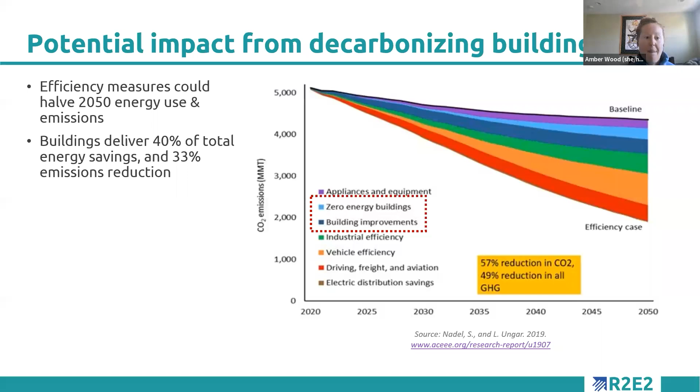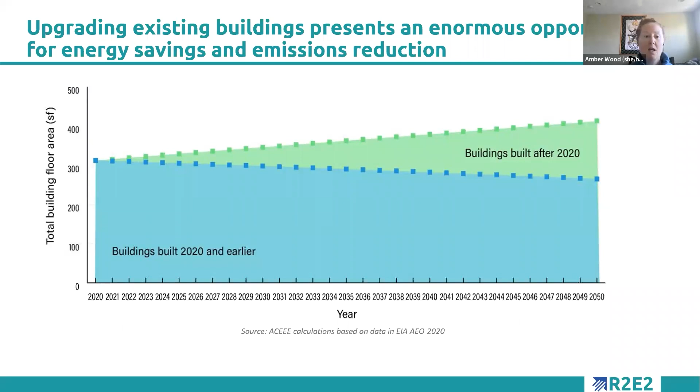So one of the questions might be, what is a building energy upgrade or retrofit, since we're using the terms interchangeably here? Before we explain decarbonization, we're going to talk a little bit about how we approach buildings. We approach them under three categories: single family, multifamily residential, and commercial buildings. The scope of retrofits and service providers who offer these services differ, as do the financing.

So the idea is that the retrofit or upgrade is really intended to be a tune-up, repair, or replacement of systems or multiple systems, with the goal of improving comfort and reducing costs.

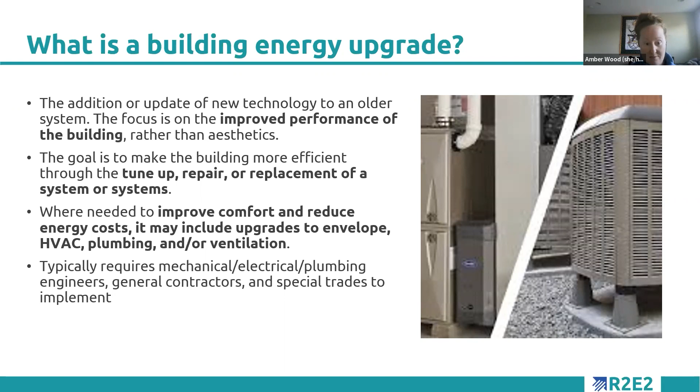So those are kind of single retrofits - the possibility to simply upgrade an individual piece of equipment, like a heating system. But we also want to touch here on comprehensive building energy upgrades, which are a whole building approach.

Sometimes this gets into deeper energy savings, but really we're talking a whole building approach which addresses multiple systems - a suite of measures across a whole building, with the idea that we're also trying to improve things like indoor air quality, moisture, and pest management, and make buildings more resilient.

To give you some context, typically these can achieve 10 to 20% savings, and with a really deep energy retrofit may reach deeper energy savings up to 40% for whole house comprehensive retrofits.

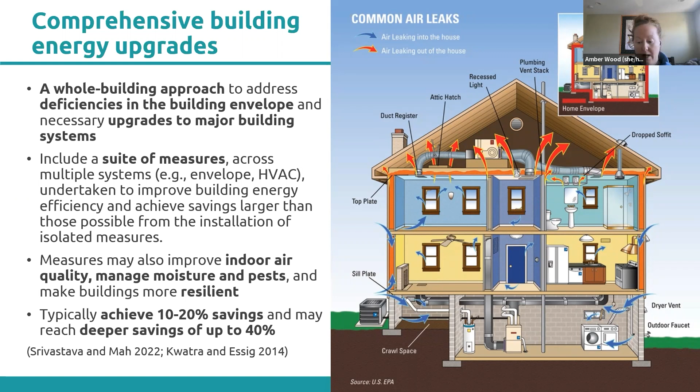We also want to define a little bit what we mean by electrification. So the high upfront cost of electrification - we're meaning electrifying the building systems in a particular home, replacing fossil fuel end uses such as heating, cooking, and even transportation with electric powered technologies.

The high costs of those are challenging for affordable housing owners, including low-income homeowners and multifamily property owners. Such stakeholders often lack the means to invest in electrification technologies and may have other priorities for any available investment dollars that we want to be sensitive and mindful of.

Additional barriers to electrification may also include uncertainty and variability of monthly energy cost savings from electrification, particularly heat pumps for space heating, due to differences in climate, electricity rates, fuel costs, and equipment efficiency.

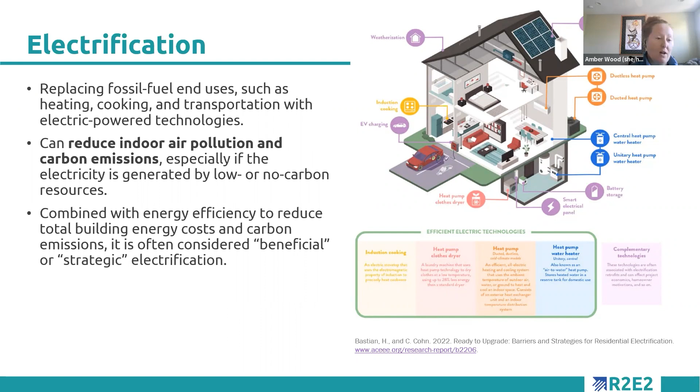So we just want to note that what we're really talking about here in the electrification space is beneficial or strategic electrification, where we're ensuring that we're considering all of these factors as we're talking about electrifying building systems.

Energy upgrades and electrification are often intertwined for decarbonization. We often talk about energy efficiency as the basis for decarbonization, and that usually involves both energy efficiency from the standpoint of weatherization upgrades, envelope upgrades, and then adding...

Electrification of existing fossil fuel end uses like water heating and space heating. And then it can also include potentially solar and other use of carbon-free fuels beyond that as well.

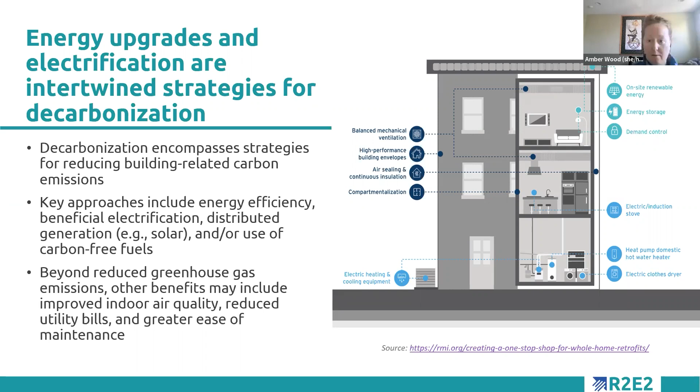So with that, we have another activity. I think this is actually the third question - if Ethan, you could bring this up - what are your main priorities when you're thinking about developing a building upgrade initiative? This has a little bit more reading, so I'm going to pause here and let you go through the options, and we'll give you a minute and then bring up the results.

I'm hopeful that was enough time, and also that you had a little space from just me talking. So Ethan, if you could please bring up the results. Yeah, so your main priorities - the highest one is return on investment, followed by a tie between biggest greenhouse gas savings and upfront costs for a building owner, which are both very important considerations. So thank you for answering that.

All right, so next we get into our key technologies, which I will get to on our next slide. And Rohini is actually going to take this next section. So over to you, Rohini. Thank you. Yeah, thanks Amber, for setting the stage and getting all the terms up front.

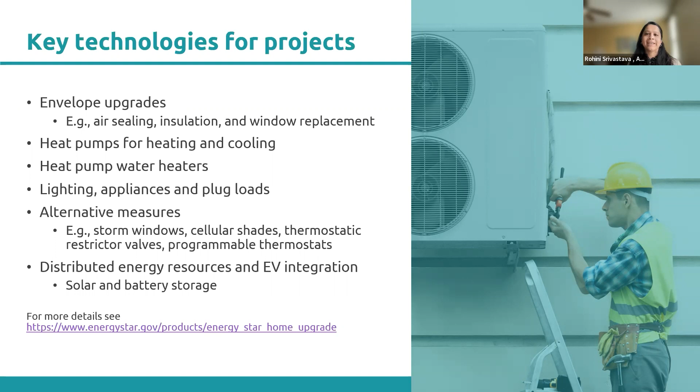So the first technology we're talking about are envelope upgrades. The envelope is actually the barrier, the separation of the interior and exterior of the building. Any measure that helps to make that separation more efficient is what we'll be discussing in the next few slides.

A well-insulated and well-sealed building envelope is critical to ensure the installed technologies perform as expected. Leaky buildings will force the equipment and appliances to work harder to deliver comfort, particularly when we are talking about space heating and cooling, and may even negate the benefits of upgrading to an efficient electric technology.

So when we talk about measures, these could include air sealing, duct sealing, and there are new technologies such as sprayable sealants and membranes. It includes insulating windows, walls, attics, and foundations, door and window replacement, and part of it is also installing secondary windows.

These measures can typically save 15% of heating and cooling costs in a home, or overall 11% of energy costs. And in a retrofit, reducing the building energy demand as much as possible should be a key priority.

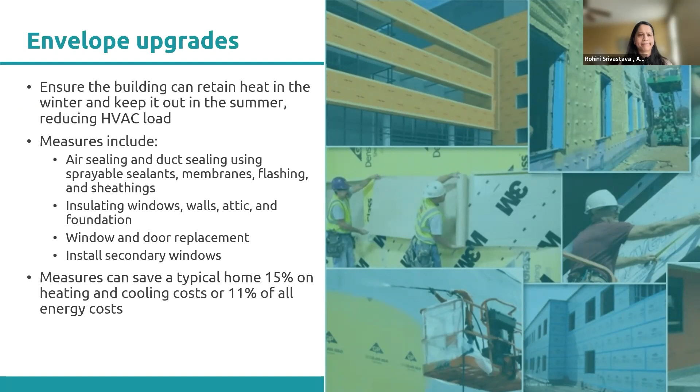So the next technology is secondary windows. These windows are inserts, especially in windows that are single pane. And we have seen that single pane windows are the weakest energy efficiency link in a building envelope.

Windows account for approximately 39% of the annual US energy used to heat commercial buildings and 28% of energy used to cool buildings. So secondary windows are higher. These higher performing windows can reduce annual US energy use by up to 75%.

But replacing windows can be really expensive. So these new kinds of building inserts, window inserts, provide the same performance as a typical window for about 10 to 25% of the cost. These are lightweight, high performance, ultra thin glass that's insulated in a low fiberglass frame.

So on the right, you'll see it's an insert that's put into an existing window frame. It reduces air infiltration, can result in additional energy savings, and accelerate the payback, particularly in cold climates.

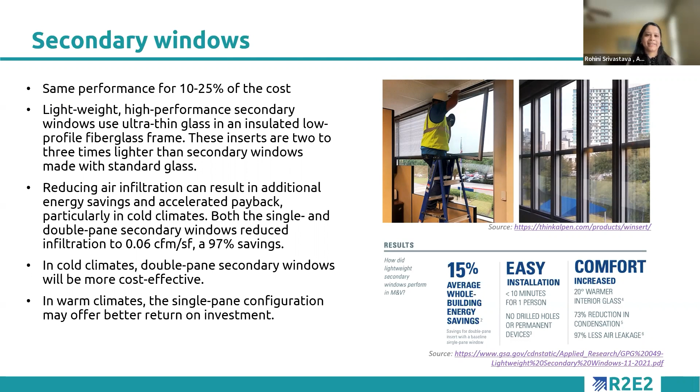So the next technology we're talking about are heat pumps for heating and cooling. Heat pumps have emerged as an important technology as they perform both space and water heating, and they can be a vital strategy to decarbonize buildings, especially in the affordable housing sector, as they offer high efficiency, ability to provide cooling in addition to heating, and increasing capability to function in cold climates.

These systems are about 3 to 5 times more efficient than standard electric or gas heating systems and come in many varieties. Ducted heat pumps are split systems that rely on ductwork, and therefore they can be used in existing central distributed systems.

In an apartment that does not have existing ductwork, ductless mini splits may be a suitable option, as they are smaller in-unit systems that provide enough heating and cooling for a specific zone of the house. And new market viable package units are also being tested.

An example is the New York City Housing Authority and New York Power Authority and the New York State Energy Research and Development Authority, NYSERDA's program that brings to market simple cold climate heat pump replacements for room air conditioners, commonly found in many multifamily properties.

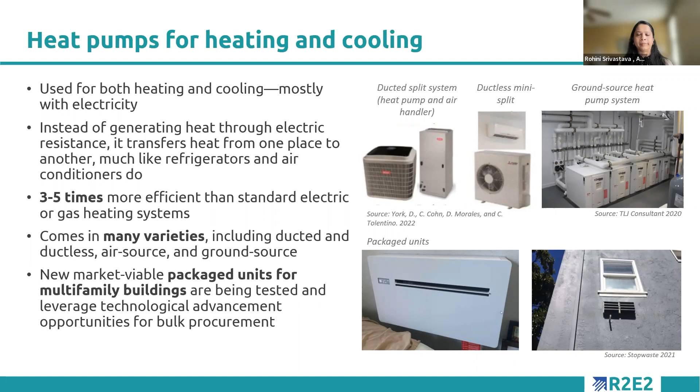The next technology is heat pump water heaters. So instead of heating indoor spaces, this equipment uses electricity, refrigerant, and coils to heat the water. They can be 2 to 3 times more efficient than conventional electric resistance water heaters.

There are different products available for these systems. There can be an in-unit water heater, a shared heat pump water heater with high capacity and high efficiency that is shared between 2 to 3 apartments, or a central system in a mechanical room.

And there are also retrofit ready plug and play 120 volt heat pump water heater technology available, which does not require expensive panel upgrades and rewiring.

And there are some unique considerations, including location and space consideration, as well as attention to noise from these systems that customers and initiative designers need to be aware of.

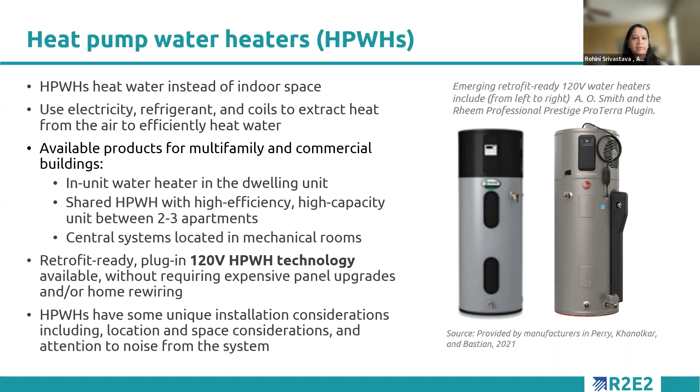The next set of technologies are lighting, appliance, and plug loads. Most of us know about LED lights, and here we are encouraging people to upgrade 100% to LED lights, use sensors and controls. Next set of upgrades are upgrading home appliances, then installing smart electric panels and smart power strips. A smart panel is a smart technology-enabled electrical panel which monitors energy use in the home and helps the homeowner control those loads. And then the last one is making sure we're upgrading to Energy Star certified consumer electronics.

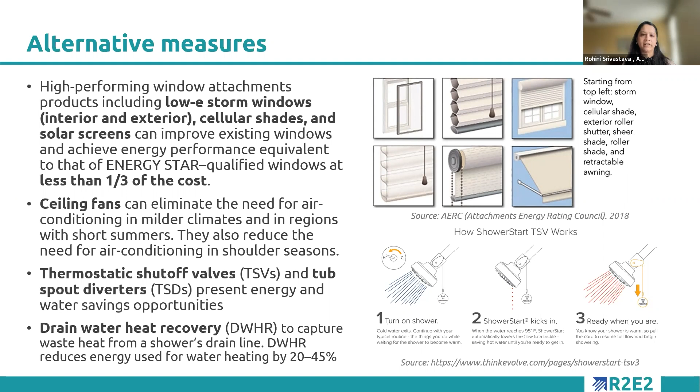There are also some alternative measures to heating and cooling systems in buildings. These are simple systems or equipment available at lower cost, including window attachments such as low-E storm windows, cellular shades, and solar screens. On the right you'll see examples of what these window attachments could look like. The Attachments Energy Rating Council provides a rating, certification, and labeling of window attachment products with energy performance scores to help consumers compare these products. You could also include ceiling fans, thermostatic shut-off valves, and tub spout diverters as other alternative measures.

The first is understanding community priorities, collaborating with stakeholders, designing packages, coupling them with electrification, and also thinking through financing and other incentives.

The first key strategy is to understand community priorities, engaging and collaborating with the community around their needs. Are there different segments of a community that have different priorities, and how can an initiative tailor its offerings to meet those needs?

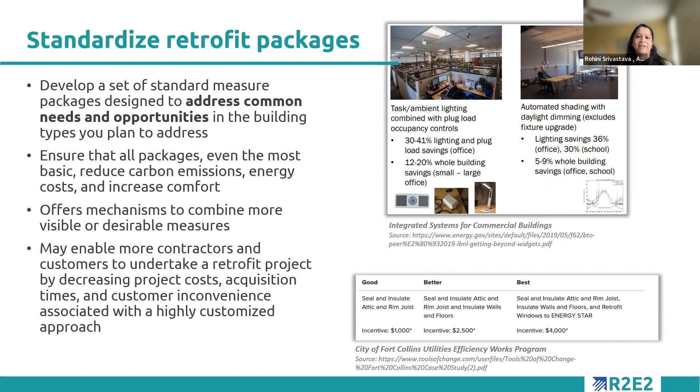The next strategy talks about incorporating low-cost measures in an initiative. This reduces energy use, utility bills, and emissions while improving comfort, including alternatives to traditional measures addressing heating, cooling, water heating, and lighting. It could include weather stripping, pipe wraps, storm windows, and spout diverters as examples, and may also include supplemental measures that save energy in other end-use categories. If you're talking about a multifamily upgrade, these low-cost measures could be included in a single home or unit.

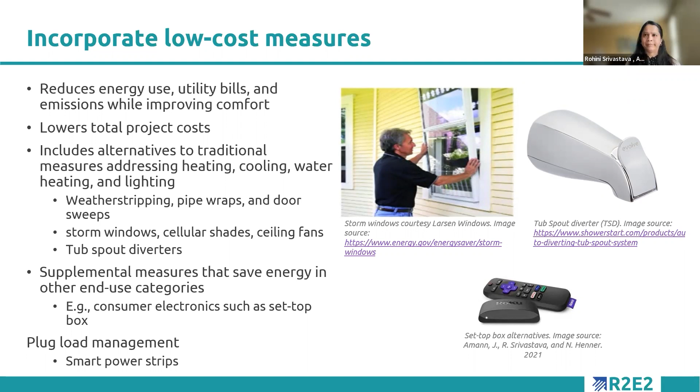The next strategy is about staging retrofits to meet customers where they are. Splitting into stages can make the process less complicated for customers. It could include pre-retrofit measures such as health and safety measures, deferred maintenance, and mold remediation actions, and then get into more complicated equipment or envelope upgrades. All things being equal, envelope upgrades should be considered first as they make buildings more efficient, and then get into equipment and system upgrades. This approach helps optimize the system and avoids oversizing.

However, there might be instances where a system is nearing end of life, and in those situations equipment replacement becomes a priority, with other measures complementing that upgrade. Splitting also allows customers to take immediate action first, and enables ongoing engagement to support completion of a full retrofit over time.

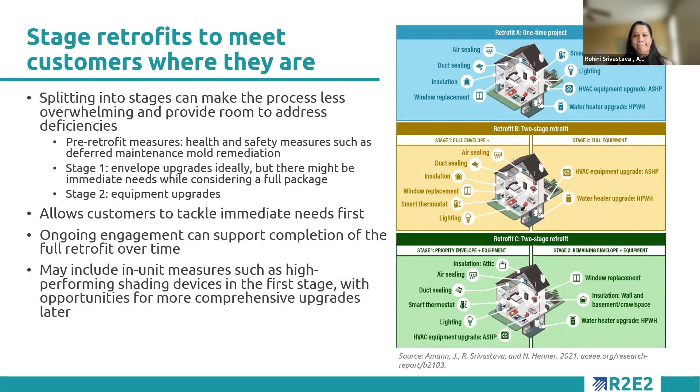The next strategy is coupling electrification with retrofit projects. This helps maximize emission reductions and improves overall performance, and reduces the cost of electrification where natural gas is cheaper. At the project level, electrification can increase cost effectiveness and facilitate the transition to a decarbonized building stock. When electrification, such as upgrading the heating or cooling system, is done with an energy efficiency upgrade, such as weatherization, it does not require many additional steps, such as a panel upgrade or additional appliances to monitor. It also influences the equipment choices to quite an extent.